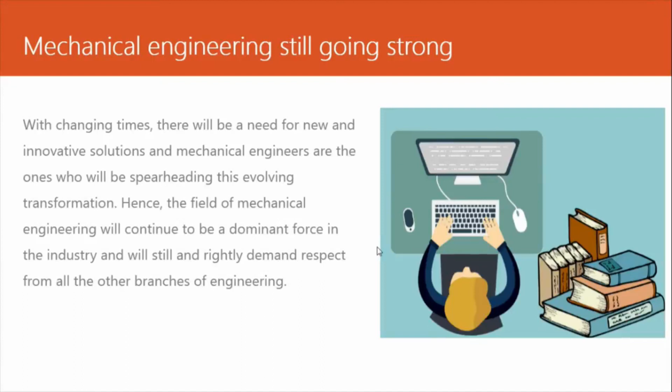If software is from civil industry, developers of that software will be from civil industry, a larger proportion of engineers, because to develop these softwares fundamental engineering knowledge is required, and that fundamental knowledge exists only with engineers from that particular branch. So it is not necessary that software engineering or computer science is the only good path, yes it is always good, but it is not like mechanical engineering is lagging. It is still strong and it will be strong. It is a dominant stream in engineering.

So what are the things which can be expected from future mechanical engineers? These are a few promising areas for the future. I have listed 7 segments from mechanical engineering where demand will be higher for engineers in these sectors. First is electric vehicles.

Obviously, in the world the momentum is gained by electric vehicles. Developed countries like European countries or US have already gained momentum on electric vehicles. Countries like ours are still in developing segment, gaining momentum at a slow pace, but definitely there will be huge demand in electric vehicles in future, because government has changed policies, so it is incentivized by the government. There are a lot of subsidies on electric vehicles, because government also wants to minimize dependency on diesel or petrol, because ultimately it is going to save money.

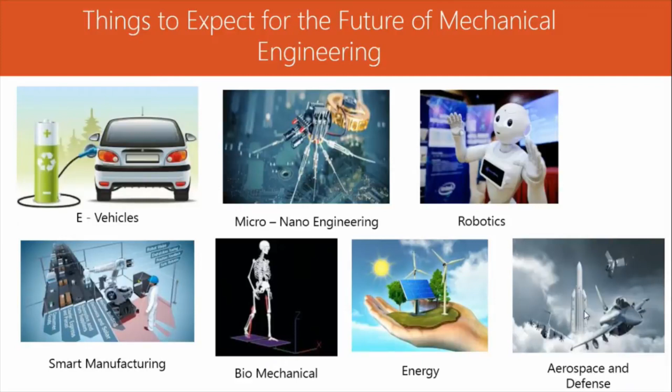Just discussing the scope is not enough - gaining the skill set specific to this sector or any other sector is important. So I'm going to discuss this in the upcoming slides. I've discussed which areas mechanical engineers will be in demand. Now, where does a mechanical engineer actually stand in these sectors? I have broadly mentioned three sectors.

One is CAD and CAE. CAD means computer aided design and CAE means computer aided engineering. CAD-CAE is basically a research and development related profile.

Then comes manufacturing, the second skill set or area. If you go to produce anything, manufacturing technology will be required. There are a lot of software related to manufacturing, and there will be some design of the manufacturing process. Skills like Six Sigma, cost saving techniques, and time saving techniques will be required in the manufacturing field.

And lastly, I like startups most of the time. So mechanical engineers can think of starting an entrepreneurship journey in these sectors or any other sectors. Apart from these core mechanical sectors, I recommend mechanical engineers also go through interdisciplinary skills.

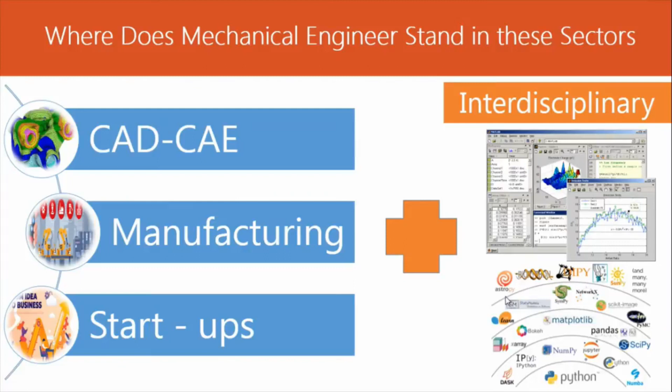Now I will start with CAD and CAE. CAD and CAE are basically a core part of mechanical engineering. If you see all the profiles related to research and development or design, these fall under CAD and CAE.

If you look at core mechanical engineering, it's divided into two parts - one is R&D and one is manufacturing. R&D is like the soft part, manufacturing is the hard part. In R&D there is CAD and CAE. In manufacturing you can see Six Sigma, simulation of manufacturing processes, quality control, process design, and all other segments in manufacturing.

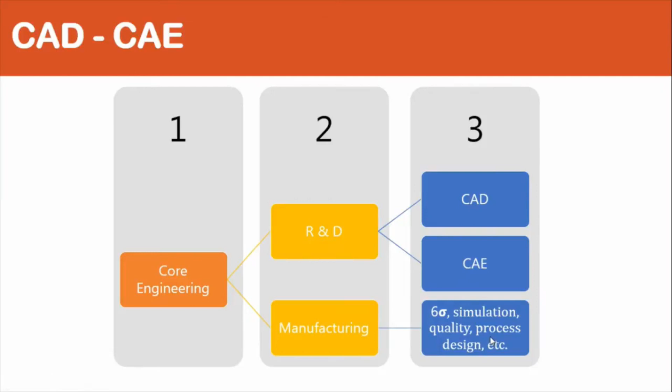Let's go further. CAD - so out of CAD and CAE, CAD is computer aided design. Basically, it means digitally creating a real world product before manufacturing. If you decide to manufacture any product, there will be a design process for that product, with some design calculations and some concept of that product.

If we see any car or any fixture or any product, there will be software to create the digital image of that product. In the picture you can see a sheet metal part, a car body, some fixture, and some mold or die.

Even in CAD there are multiple profiles for CAD engineers. In industry, people who work on this kind of job are mainly called CAD engineers. So in CAD there are these many verticals.

One is system design, one is sheet metal design, one is BIW design, jig fixture design, tool, die, mold design, and product design. System design means - if you take a car as one system, the car has a number of subsystems.

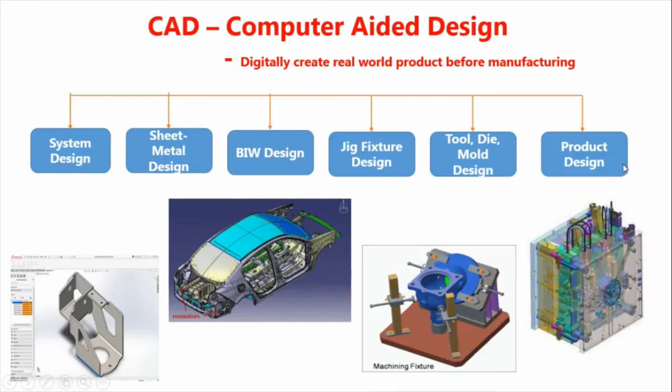So I will come to the main part - what are the top CAD softwares used in the industry? I have discussed the different job profiles available for a CAD engineer. Now these are the few softwares mainly used in the industry.

There is CATIA, from Dassault Systemes company. Then there is SolidWorks, also from Dassault Systemes. CATIA is famous in the aerospace industry because aerospace industry requires surface modeling features, so CATIA is very good in surface modeling.

Then SolidWorks - you can say this is a top candidate in the industry. SolidWorks is a very good software, my favorite software. It can handle large amounts of assemblies effectively. It is widely used in machining industries, automotive industries, even every industry.

Then there is Creo Parametric, also a well-known software - a very famous CAD software, from PTC company, PTC Creo. Then Siemens Unigraphics, from Siemens company. Then Solid Edge, also from Siemens. Then Autodesk Inventor.

So these are the top CAD softwares, you can choose any one. If you learn any one of these software, you can learn other softwares very easily, because the functionality of many CAD softwares will be the same.

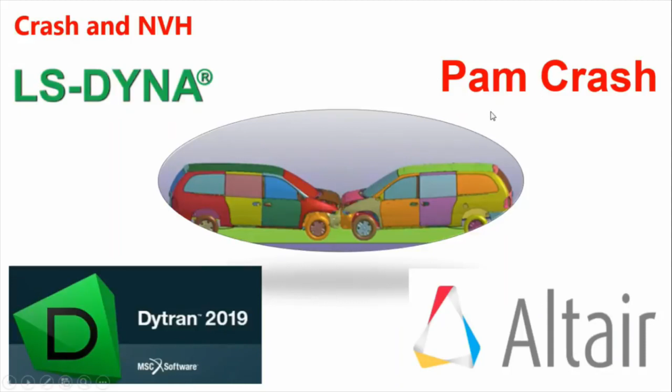You can think of learning this software - it has large demand for engineers. Then there is PAM Crash, specific to crash analysis. Then there is Altair, which has a crash analysis segment. Then there is Dytran from MSC Software. But LS Dyna is the most popular, so you can start with LS Dyna if you have interest in this kind of analysis.

Then I will compare CAD and CAE. In CAD, you design or model the digital design of the object, and in CAE you analyze the design of that object. In the CAD sector, a large number of jobs are available - CAD engineers are required in small, medium and large industries, every industry will require CAD engineers.

Then CAE - relatively fewer jobs are available. Mainly very large companies use CAE softwares, and companies below the OEMs, or suppliers of such large companies, use CAE. In small industries you will not find CAE softwares, though there are some companies providing CAE services. CAD requires minimum skill - CAD engineers mainly need software-related skills, while CAE requires very high fundamental knowledge of that domain.

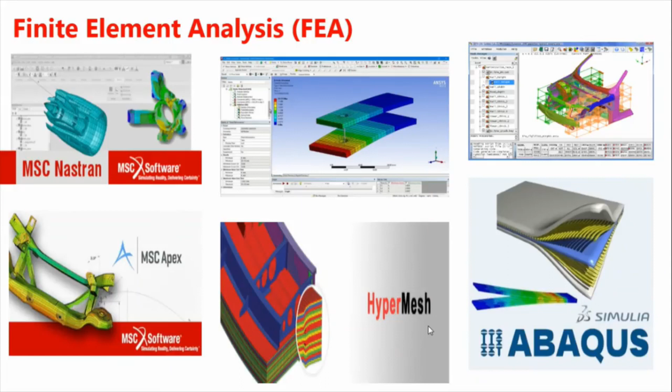So I have talked about many softwares. Basically, I have talked about what are the industry user softwares. I have not mentioned all the softwares - there are a lot of softwares, but my focus was only on the industry user softwares. So you can choose your area of interest and start learning from these tools. You can think of an entrepreneurship journey.

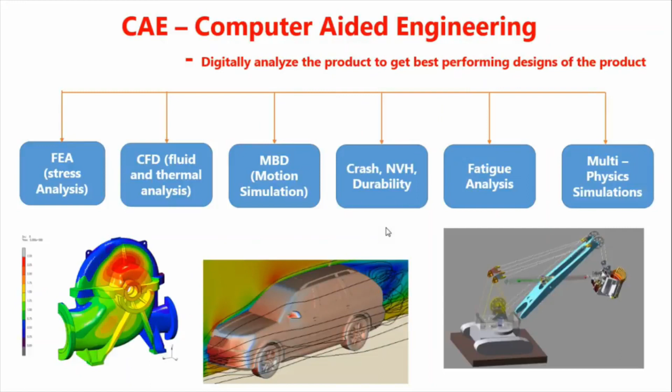So thanks for your time. I hope you have liked this talk. Mainly I wanted to share what are the main softwares used by the industry. If you want any specific related knowledge, let's say FEA or MBD, I can deliver that specific to the area, but this talk was very general. I just wanted to make you aware of the industry skills required and where actually you stand.

In your curriculum, most of the time your curriculum is not aligned with industrial requirement. So whatever curriculum is there, it is okay to do it for passing, but remember to learn the skills. Without skill there is nothing. Even if you say I have money, I can start the business, but to run the business it does require skills - financial skills, technical skills. So industry has become skill specific.

You might have heard news in the last few months about a K-shaped type of economic recovery this year. Basically, K-shaped type of economic recovery talks about the sustaining of professionals. So those people will sustain in this kind of time who have professional skills or the right skills.

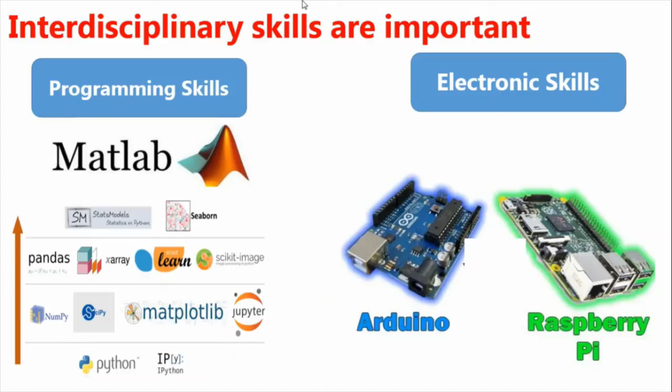Knowledge doesn't go to waste, it will help you one day. If you learn something today, it may not help you immediately, but definitely it is going to help you someday in your life. Knowledge is like a sword, it definitely doesn't go to waste. So keep learning, keep acquiring new skills, and thank you for listening to me. Thank you and have a nice time.